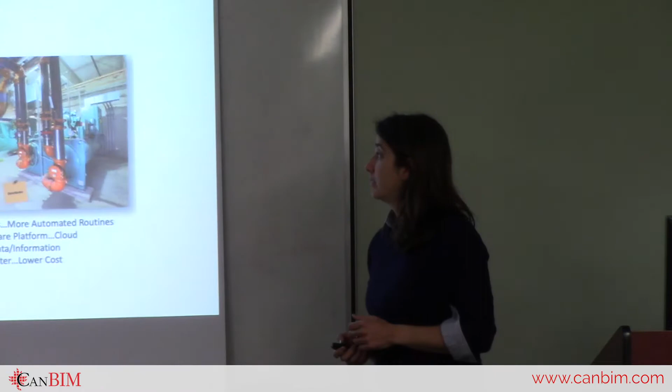So what did we used to do? I actually, for my 16th birthday, got an electric eraser. Some of you guys might not even know what erasers are anymore. That was cool when I was 16 because I would draft on the side for the family business. But what we did and what we still do is a highly manual paper-based process.

Just because you buy a computer does not mean you've replaced paper. You've made it digital. I take notes all the time on my tablet. It's still paper, it's just a digital piece of paper.

So highly manual, it's got errors. It's just by nature, you're going to deal with a lot of people, and people are good at nature but create errors. So you have a lot of redundancy in that, a lot of checking. When I came into my company, we had a 40-plus year veteran in our department that would check to make sure the computer takeoffs were correct.

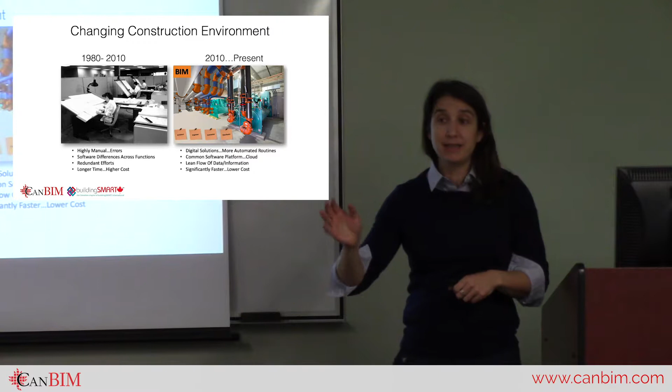I was blown away, top-notch talent. This guy had more talent in his left pinky than I've learned yet in my career. He would sit there and check the computer outputs. I'm going to talk about how I still see that today. I travel 90% of my time, and I see it in every purchasing department, every fab shop, every engineering office. There's somebody checking somebody else's work.

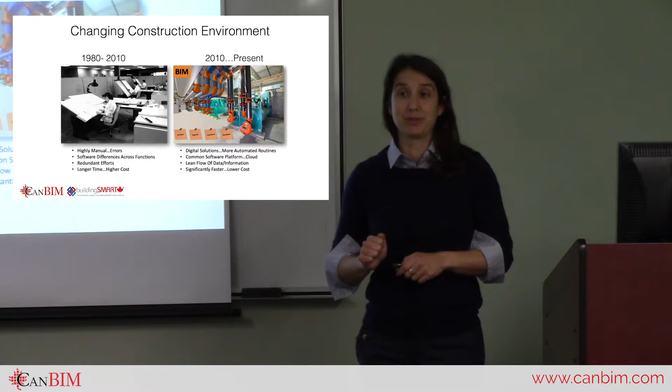So where can we go from a digital solution? How can we program, how can we allow the software and processes to avoid that manual check so we can use the talent where it's needed? And I always say about this: significantly faster at lower cost.

What's happening in our industry is it's faster, it's a higher level of quality, it's not always a lower cost. So when you hear that BIM, who thinks BIM costs more money than traditional coordination? Normally half of the room raises their hand, sometimes even more. They're like, oh my God, BIM's going to cost me a lot of money. Normally it's the younger guys in the room that say no, BIM's going to save you money.

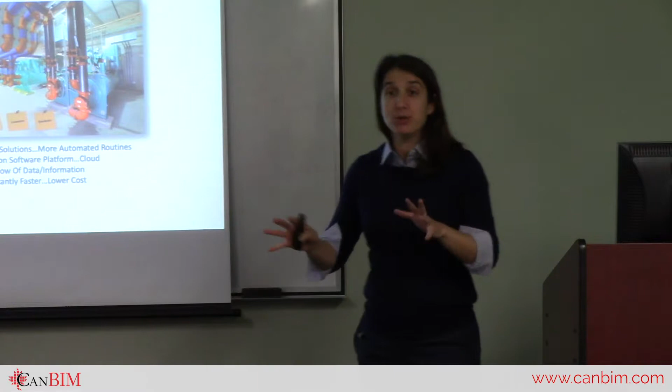I can tell you in my team, if I charge for traditional coordination, it costs more than BIM. I'm charging you more for you to send me a billion emails than I am to have me pay for the software, and you use it because of the errors we create, the lack of data analysis that we can't do in the paper-based process. We can do it, but we just don't have time to do it. So that's what we're going to talk about.

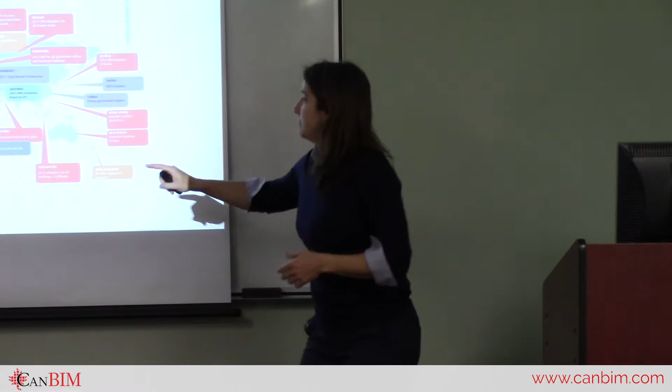We saw this earlier today in the first session. What I love about this slide is the colors mean whether they're adopted or not, but one of the most thought leaders in our industry in BIM, lean, and fabrication is Australia.

What would you think is interesting about Australia? It takes a long time to get a valve, a piece of structural steel. Anything you miss, it's a long time to get it on a slow boat from somewhere if they want it. What's interesting is it's a highly union, high cost environment, but they also share labor because there's not a lot of labor. It's pretty similar to Canada in the amount of major cities, and then a vast amount of territory in between with mining involvement.

So I always look at Australia. They're small and on the other side of the world, but they're leaning towards, they're not saying the government has to tell me to do this, but as a collective, the contractors, engineers, and architects have gotten together and said, we just want this, it's going to make our lives easier. So that's what's interesting about Australia.

If you look at Singapore, they're a very small country, population, a lot of buildings, amazing architecture going on, but they have a minister in charge of construction who can force it down. At the contractor level, they're no different than if you're in the middle of nowhere Ohio or in the middle of nowhere Saskatchewan. The contractors are still really strongly paper-based, and they're looking for people to help them learn what to do.

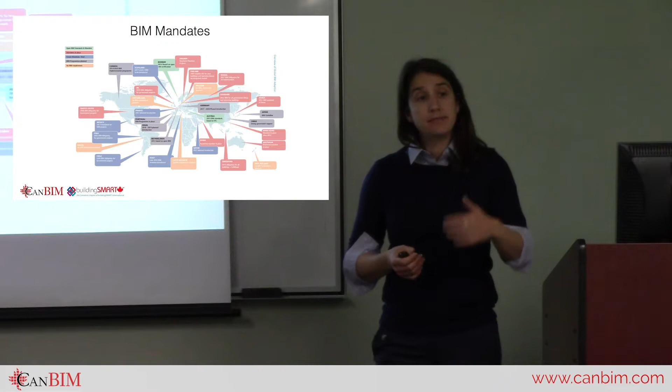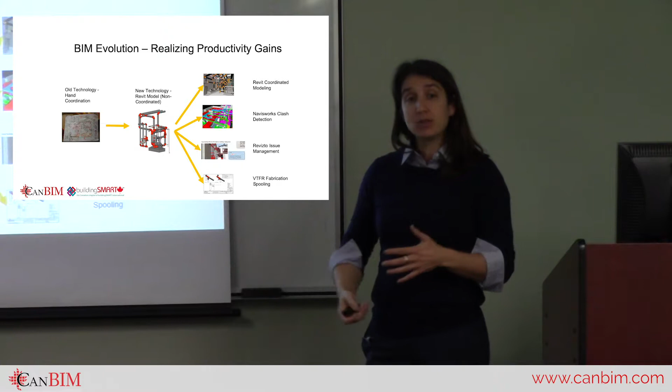It's because our industry is going to fabrication and modularization. A lot of these countries on these maps have leapfrogged other geographies because they've skipped the fab shop fab spools, where it's just a piece of pipe, a valve, and a coupling on it. They've gone to racks and skids and bathrooms and full floors. And that's where we're going. We're changing those practices and saying, how can we create a modular environment?

So I think Marriott did their first modular hotel in like 1975, 1980. It's not new. It's just not widely accepted. And why do you guys think that modularization didn't take off in the 80s? Most of the time, they said they looked like boxes. I didn't want a square box.

Modularization in the past made people think about what 70s architecture was. A lot of concrete, a lot of brick, a lot of squares, and I don't want that. So if you think, hey, modularization, it's a little modern, it's a little out there, I don't want that. It's not unique enough for me.

And now where we're going with advancements in software is architects can design almost anything. And we can decide from an MEP side, is it constructible? So the collaboration between the architect, the engineer, the owner, and the subs, we can go from concept to constructability.

One of the most unique projects I worked on was an arch, literally just over a highway in Qatar, and the building hung from the arch. So we had to get plumbing and fire protection and electrical to hang there. Ultimately, they scrapped the building because oil went down. But they dug foundations, and we had to find a way to get all of our services there.

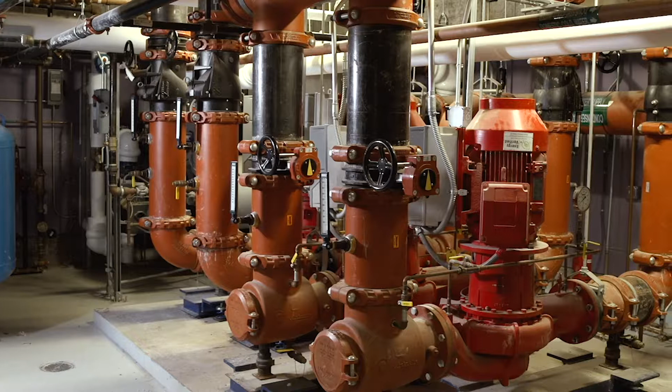So it was obvious upon initial review of the project that the mechanical room was going to be one of the areas that was very tightly constrained, just because of the size of it and the amount of systems that were going to be necessary to install.

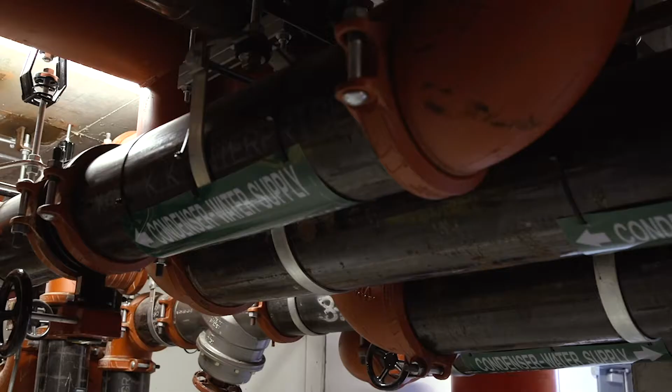So we went to Victaulic to find out what potential software opportunities were out there to help expedite the coordination effort. Victaulic brought their means and abilities to use Revit software to do a full-fledged coordination with the backgrounds we already had received from the architectural and structural engineering firms.

Victaulic and Poole & Kent had teamed up in the fabrication process. Autodesk Revit allows you to add add-ins. We had used VicTools for Revit - that fabrication add-in is what we use to produce all the Victaulic fab spools.

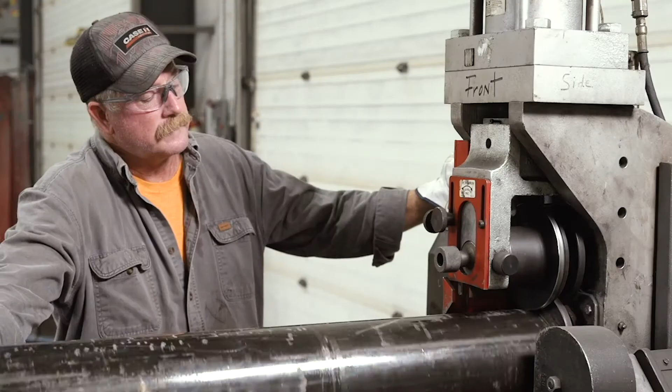Fab spools looked very well. I mean, they came in - we ended up getting the fabrication in and through the shop as fast as we could. Everything worked out nicely with the fabrication drawings.

It impacted our build schedule in a way that was beneficial to us, because we were able to get the material already pre-cut, pre-packaged, and labeled for the project.

It came down - we were able to build the room in 85 days, which was a 10-month turnaround on the entire job. The general contractor and the owner didn't believe it was going to be possible, but we were able to make it happen with the help of it.

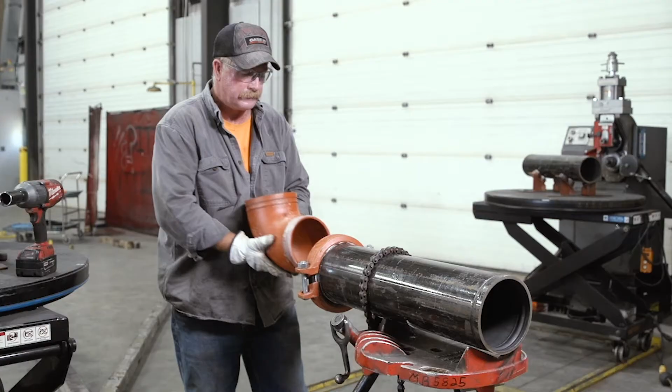Autodesk Revit was essential in Victaulic being able to complete our fabrication spools on time, allowing Poole and Kent to complete their project on time.

So what was really interesting about that project was you can watch it over and over again. What was interesting is that they were very late. A contractor has a world-class drawing team, a world-class fabrication team, and they needed - they didn't have Revit capabilities in-house.

So standard practice today in some of our industries is we'll model it in 3D CAD or fabrication, or whatever their modeling software is, and then we'll pay somebody to change it into Revit and make that the end deliverable. And they realized they couldn't work within their flow if they did that.

So by using and identifying a different software and identifying somebody that could partner with them, it was able to meet their goals. And I think that's what's big about our industry today, is there are so many people out there willing to share information.

There's online user groups, and there's Autodesk University. They have a conference in Las Vegas every year around U.S. Thanksgiving, so it's November, third week in November every year. But there's all these different groups like CanBIM that are here to help you learn the process. So that change management is an internal thing you have to do in your company, but to learn it, the technology is not that hard.

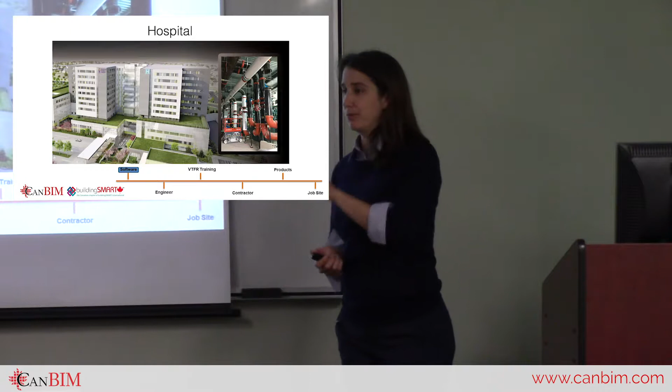So 414 Light Street, let's take that in. We don't have the rights to talk about the hospital, but it's a very large hospital in Canada somewhere that was just finished.

And the engineer on the project wanted to use, it was a Revit job. They didn't have all the expertise there. So they said, hey, I need somebody to help me be efficient using Revit. What my team did is we went in and trained them how to use Revit.

We then went in with the contractor and we said, well, we'll train you too, and let's get the engineer and the contractor together if possible. We couldn't always bring them in together physically, so virtually. Let's have the same training so no one can say I didn't know this or you didn't teach me this.

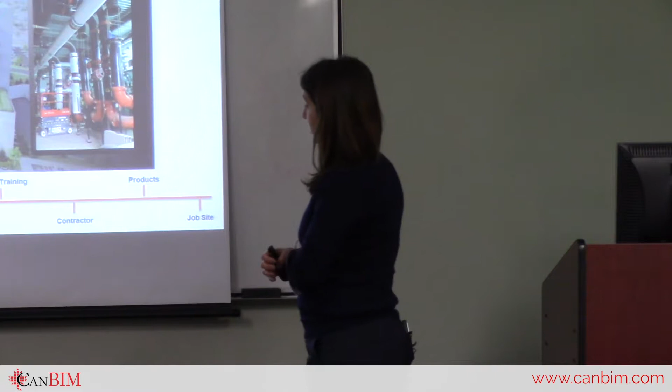And then actually for the contractor, we ended up doing some of the modeling because they had oversold some of their resources. But it really shows you how if you think up front, you can make it work. But 414 Light Street they were ready. The dirt was moved, the building was up, the owner was ready to move in. So you can have a really pre-planned environment, or you can have it where it's last minute.

It really can work both ways. It's different. Sometimes last minute is easier because you have less time to fight change.

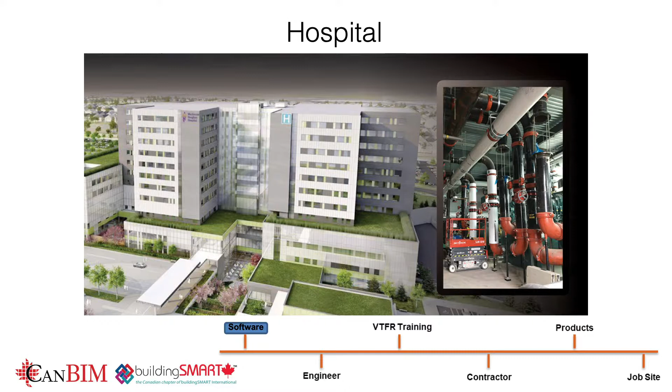And so on this hospital job, what it taught us is, we like to say we're one of the thought leaders in BIM and technology in the industry is, well, how can we use all of that data from the projects? Right now, we look at it by a project basis, or we used to. I'm going to talk a little bit about, coming up, about how we now try to aggregate all of our jobs together so that we know what we used, when we modeled it, how we modeled it, and how we can take those components and make them into more assemblies.

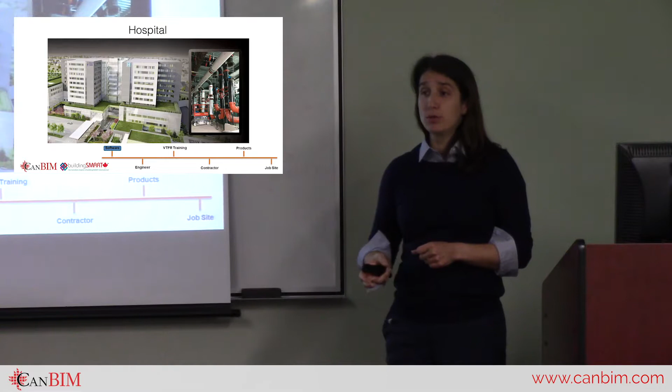So that's just a standard assembly. So we want to look at the data and break it down by building type, geography. Eventually, 3 years from now, we'll get into individual code for each municipality.

So what did we have to do in order to make these advancements? We had to create what our deliverables were. We had to have that common language so that everyone on the job, when we were saying something, there was a definition and a picture that went with it. I'll show some examples of those deliverables. If you don't show someone a picture, sometimes it's hard to understand what you're talking about.

What I loved about CanBIM, when they gave me the presentation, it said 9 places, and it said put a picture here, use the picture, don't use words. That's what we've tried to do a lot in our deliverables. Talk about methods of communication, keeping the scope.

Have you guys ever heard of nice guy syndrome? What I like to call nice guy syndrome is someone calls you up and you say sure. Somebody calls you up the next day and you say sure. All of a sudden you've said a lot of sures, and it's no longer your initial scope, but you're working around the clock because everyone's nice. I'm not saying don't be nice, but what we're trying to do with the software is know when we can, and sometimes just know, hey, it's not an option right now, or it is an option but you want to delay the time frame.

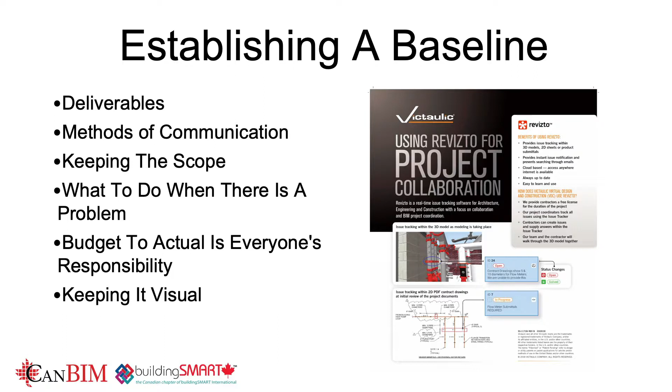And at the end, keep it visual. This is an example of one of the documents we created to share with our customers, to say this is how we will share issues with you. So every one of our projects goes out. In our kickoff meeting, we actually talk about, okay, here's our collaboration tool, here's a seat of that collaboration tool. We'll pay for it for you so you use it. We'll teach you on it. And here's why you'd want to use it.

Instead of this - in the old days, this was an Excel spreadsheet. So this is just our sample pack that goes out, because a lot of times when you're dealing with contractual methods, you just don't know what you're dealing with. So every job, we cloud over what we're doing. I love it when we talk about LOD 200, 300, 325, 327, 444 - people have made their own versions of LOD that go back to nothing.

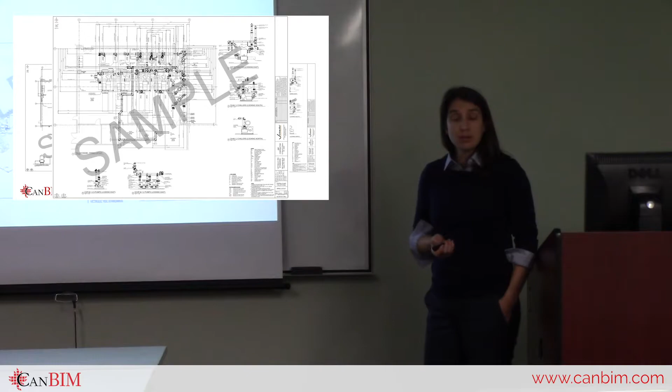So what does a picture do? A picture shows you what we're going to give you and how it's going to look, and it's going to be standard. One thing about our industry is this document can look a million different ways. What we've done is say, okay, you would not know if one of my team members in Richmond Hill or one of my team members in Easton, Pennsylvania did this document. It's just standard, and the computer spits it out.

And that's why we want to use talent where it's best served. Having someone spend all their time rotating and putting views on a sheet that someone may or may not use in a fabrication shop or on the job site - is there any value to it? I'll show later on where we're working with another software company where we're actually eliminating the paper, if you want to eliminate the paper.

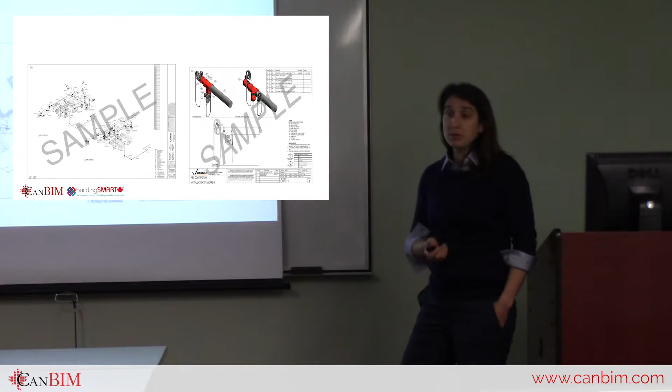The biggest change we made, which the data and good content allowed us to do, is we switched from manual takeoffs to model-based takeoffs.

Year to date, I've done 900 models for estimates. A manual takeoff, say just doing the mechanical spaces for a large hospital, would have taken about 30 to 40 hours, about a week's worth of work, by the time we did the takeoff and checked it. And you know how you check a manual takeoff on a job? You do another manual takeoff of the job. There's no way to really check it. People will spot check it with a guy and a pencil.

But we switched to model-based estimates, and that was a change. On average for a hospital, not talking distribution, depending on how large the job is, we don't always do the model for it, but we'll do a running meters worth of pipe and we've broken it down to a calculation. On average, for the whole hospital, all the mechanical spaces where you've got 80% of your money, it's 4 hours.

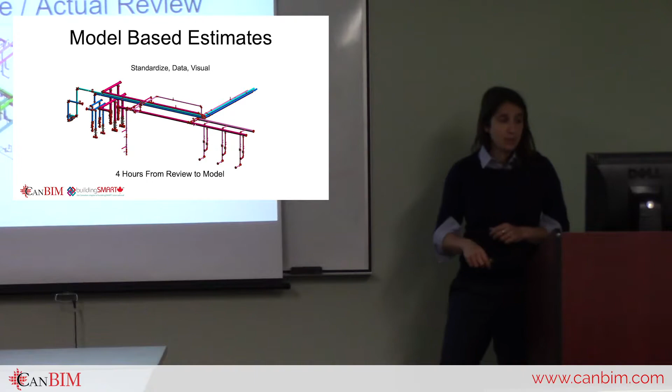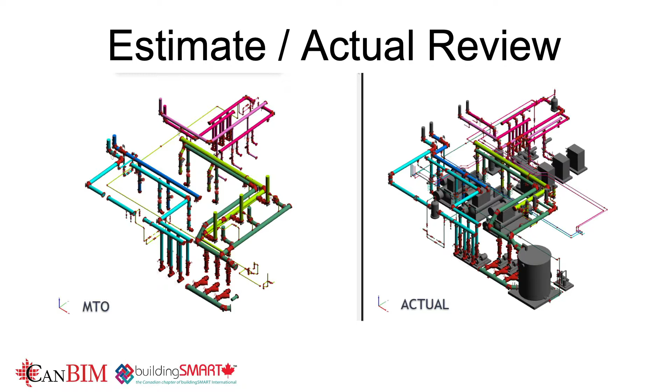So this is a live one. This is our estimate compared to our actual. And what the technology allows us to do, since we have a model-based estimate, is we can overlay them. If you don't do this today, or if you want to see design changes, you don't have to start at the estimate. You can start once you're through a couple phases of construction and overlay those. This could be duct, this could be structure, this can be anything, but you can see where those changes are.

So we do it from a visual perspective, and then we also have a spreadsheet that gives us diameter, inches, product, and those other key financial metrics that we look at.

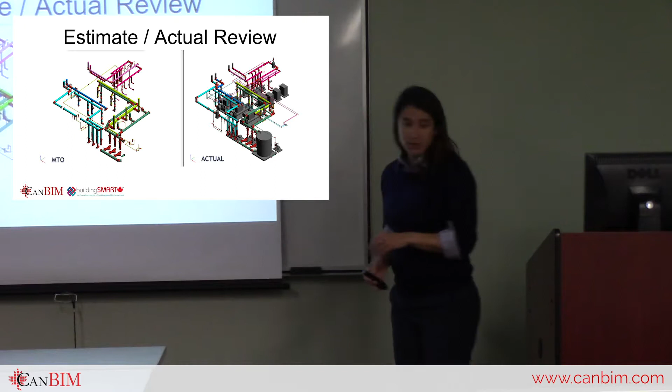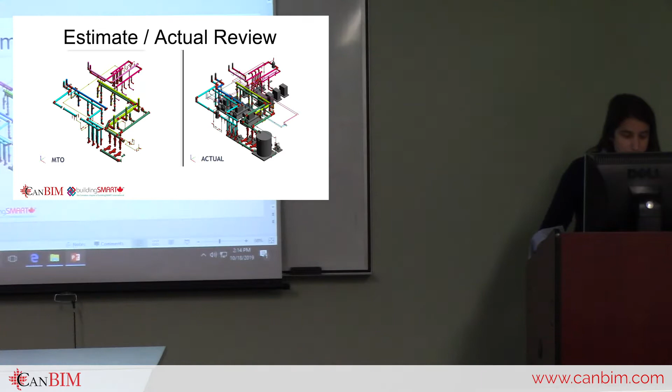But one of the best things that I think is... let's see. Oh, did it pop up? Sorry, this computer doesn't have 3D PDFs on it, maybe.

We also use 3D PDFs just to communicate information. We're talking about high tech and low tech, so just sharing this out on a 3D PDF where someone can walk around and see on the job site what they're supposed to see and what they're not supposed to see, using Acrobat Reader or Navis Viewer on your phone or tablet. We do that, and then we also use augmented reality where you can go in and it pops up in front of you.

But how do you go from this, which, who thinks that this is really quick and easy?

We should probably say it by age group. Most people would say, oh, this is so simple. I can get a piece of paper out, I've got a pen in my pocket, I can mark it up, take it back, take a picture of it, and they can work on it.

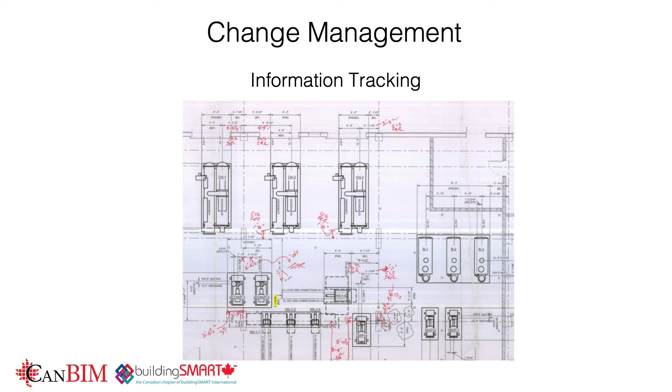This is my handwriting, and you can tell I failed handwriting class. So what happens? No one can ever read anybody's handwriting, and you've got to go back and interpret it. You've got to call that person up and ask what that dimension meant. I'm always fascinated that when you go to construction sites, there's more cardboard and pencils than anywhere else, and everything comes back with a Sharpie marker on cardboard.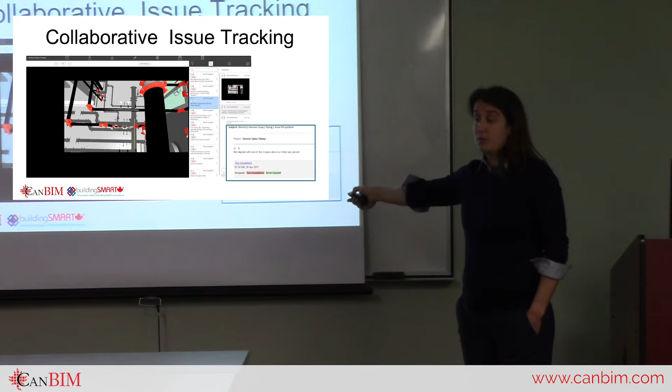Well, first what we did is we let the field do this, and then the person in the office had to go log everything. So it wasn't what the program was intended for, but it got us to where, besides me counting all those things I've got to fix, this now gives me a report of how many open items we have, how long they've been open, and who they're assigned to. So the change management is: path of least resistance - have somebody just data input it.

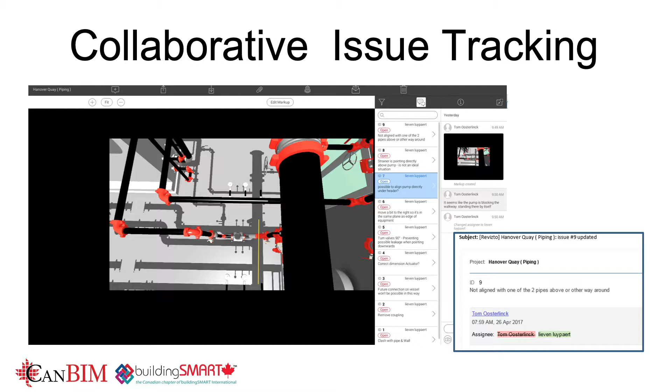Now, a couple years down our journey with repeat customers, everyone likes it because it's easy, it gives the picture. What's interesting - you can't see it on this one - but we put all of our 2D and 3D documents in it, so you have access to every document on that job if you want.

What we really try to do is not overload people with too much information, because of analysis paralysis - people will look at stuff until it's too long. But now we have this. We're actually working with the software company, saying this is great, but it's really on a project-by-project basis. You can see how many issues you've had, and it notifies the person if an issue's been out too long. But I've got 120 open projects.

At my level, I don't want to see every single issue - I just want to know if we're closing them in time. That's really where I see our industry going. Three years ago this wasn't a possibility, and I think at their user group in November they're going to announce it. So all we did was ask for a dashboard view.

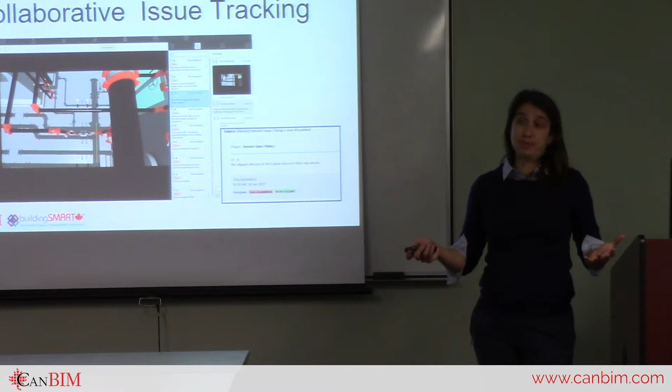So who's a gamer? You guys all play video games? Okay.

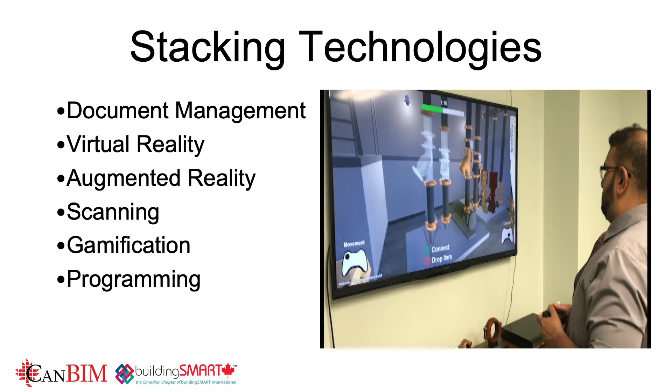Revit's cool if you've been in the industry and thought 2D was good - going to 3D, that's awesome. But if you want somebody to come into our industry for modeling - I mean, I don't personally enjoy it myself - what we're looking at is, from a training perspective, how do we use gamification to attract people into our industry and train them.

The fire local in Toronto just called us up and said, hey, I'd love to teach our guys virtually how to trim out valves before we go into the shop environment and actually trim out the valves.

So what we've been working on the last couple years is bringing in students like yourselves. What we do is have them put the pump build together in the office - they play the game, model it in Revit, and then they build it. That brings a level of safety into it, so we're not putting you with tools before you're ready for them, but it also gives you the ability - if you could virtually put it together and build that virtual plan before you actually went out to the job site - you're that much more prepared.

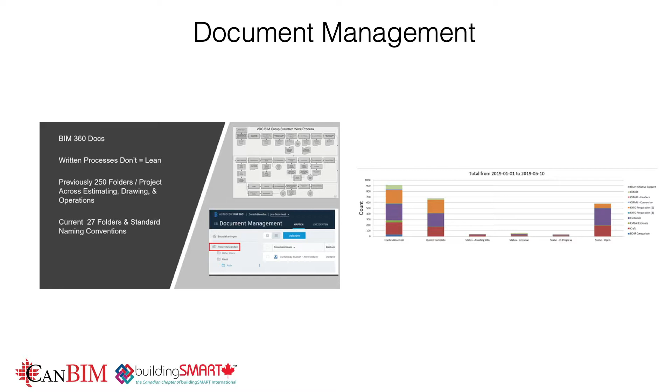This is where I was talking about from a document management perspective. Long before I came to Victaulic, we had flow charts and process maps. We were so ineffective. We literally had 250 folders, and we went to 27. We're no different than any other architect, engineer, contractor out there. I bet if you counted how many folders you had and how many times people were saving the same document, you'd get to a similar number. Our estimating team had their own sheets and never shared them once they were sold. It was like, this is my information, you can't have it, you've got to call me, you got to give me a bottle of bourbon or your firstborn child, and it still wouldn't give you the info. So there was some change management that went through, and we had to say, okay, everyone's on the same platform.

One thing that is big with change management is you're going to show your issues. Showing an error or a mistake is much better than covering it up, in my perspective. It's not about saying this person did something wrong, it's about fixing it. We all make mistakes. If somebody says they don't, they're wrong.

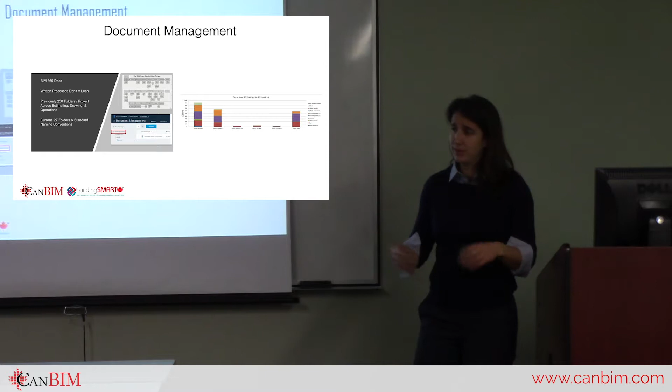So here's what we did. We changed over to using the BIM 360 platform. You could see where here we had our paper-based process. We looked out on the market and saw what was available, what cost point could we afford for the team, and did that analysis. We then said, okay, how will our internal tools work with it? Is there any need for programming? Is there any need for duplicate data entry? And now where we are today is one source of the truth.

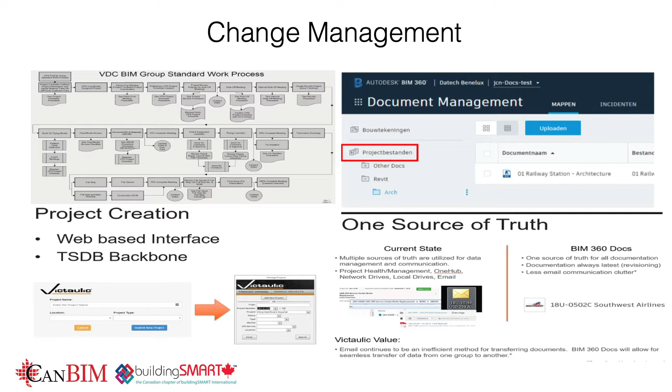So I talked about having that exploratory discovery phase, that implementation phase, that maintenance and building upon that technology. We signed a 3-year contract. So year 2 next year, I have to decide if it's a go or no go to kill the software, because it takes time. So what we do, it pops up on our Outlook calendar that says it's time to review if we are going to stay with it or not. Simple process - the day we sign a contract, we put a couple email alerts into our calendars and our master calendar, and it tells us hey, it's time, and we highlight months by those phases. It's so simple, easy, and visual, and we just know when you have a project, what are we going to use? Because next year there might be something better or something less expensive or something more widely used. So we want to have that understanding.

Who here's been on a scan or scanned a project before?

I would say most underutilized tech in our industry is scanning. The United Association of Pipe Fitters every year for Canada, the US, Scotland, Ireland and Australia comes to Michigan, and there's a couple thousand trainers, and every year there's like 7 people that sign up for the scanning class. Total station layout for hanger inserts - classes are full. Scanning classes, I cannot figure out why people don't sign up for this.

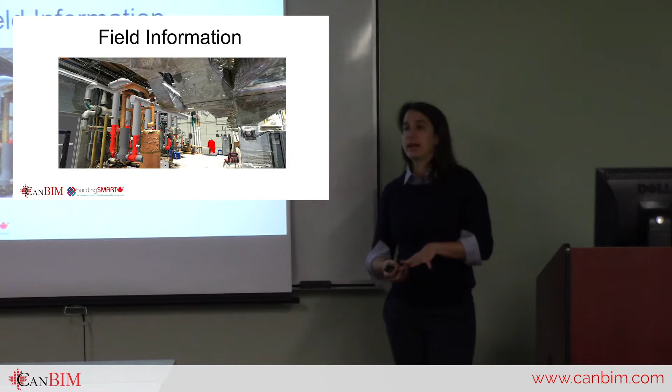So our process - this is a job we did. Black was reality. Red was where it was supposed to be.

So a lot of people think that when you cut on a job site, you're only cutting that one piece, and it doesn't affect everything else down the road. So what we did is we went out there, we scanned it, we pulled some quick dimensions, we pulled it into virtual reality, and we actually walked the owner through and showed him that the penetrations were not in the right spot.

Couldn't get him out to the job site, but we could get him to sit in his office. He was into tech, but if not, we could have just shown him on the screen. But he was able to walk and see that hole was in the wrong spot.

The same amount of time it took us to do the field measurements on this size of a job was the same amount of time. We didn't save time, but we had a repeatable image that we could go prove to management and field personnel what the issue was.

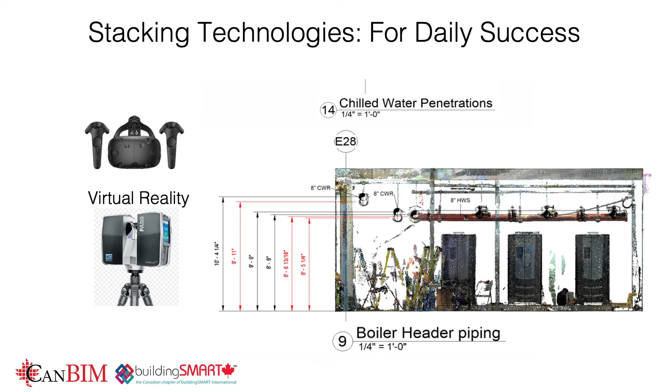So what I talk about, stacking technologies, is we then use this internally as a learning lesson, because you can't get to every job site. What do a lot of guys on the job site not like? A whole bunch of students walking around and getting in the way all the time. But also, I can walk through 200 projects now in the office, and I can have a better plan for when I'm out there learning on the job site.

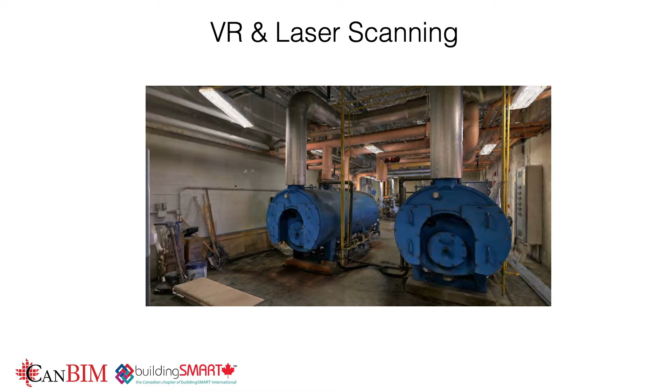So this is a scan of a little retrofit, and I picked this job because it's a small mechanical room, but it shows that you don't need large projects to make this tech valuable.

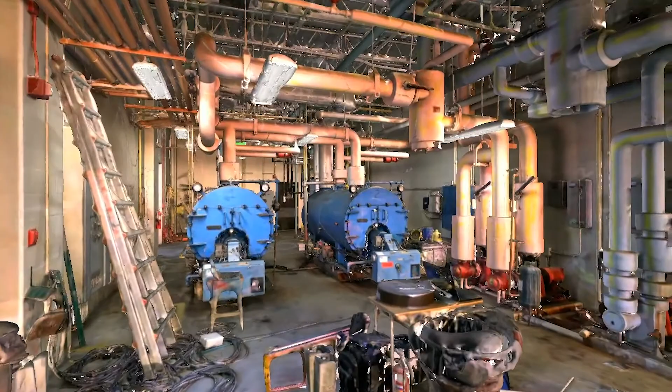This project was about an hour and a half away from our office. We drove there, set up the scanner 15 times, and came back. By the end of the second day, we were able to walk through the project, and we were able to work with our customer and the other trades to actually determine what was really coming out of that boiler room and what was staying in the room.

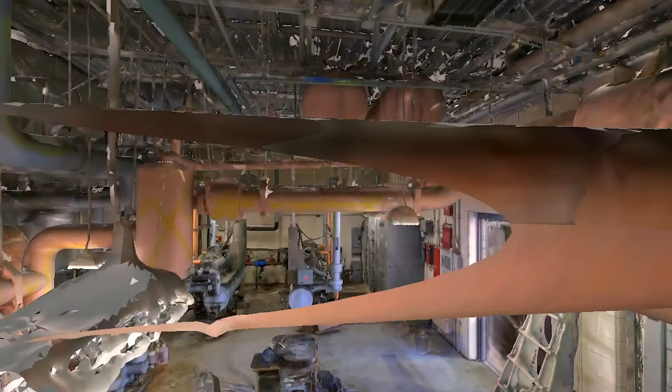A lot of times, on the phone, you're like, oh yeah, the gas line's coming out, it's moving. Well, which one? The one on the northeast corridor, close to the mop sink. Oh, okay, really? So this allows you to instantaneously cloud over it, mark it up, and say, hey, this is coming out. So this was the job scanned.

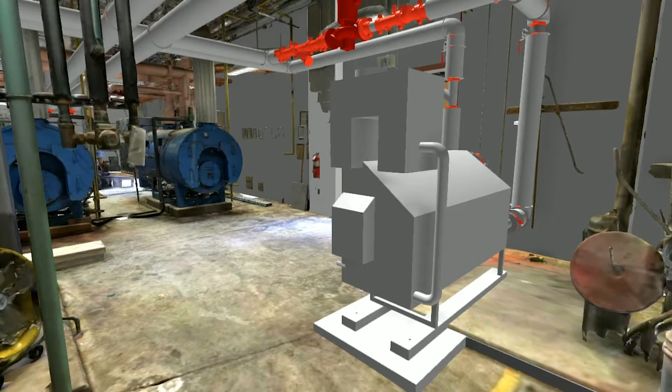This is like us going through the headset where we went in, and now you saw where the pipe was going, and the new equipment. So we were able to take dimensions of the doors to see if it fit in the room. We were able to see what we were going to hit.

Do you guys think a scan is 100% accurate? No, you're going to hit something. That's why you're fitters and skilled trades. So you're going to hit something, but we're going to identify where those hits might happen, and we're going to put breaks either in the system. So we're not going to make that into a modular unit, or we're just going to say, hey, you're going to have a problem here.

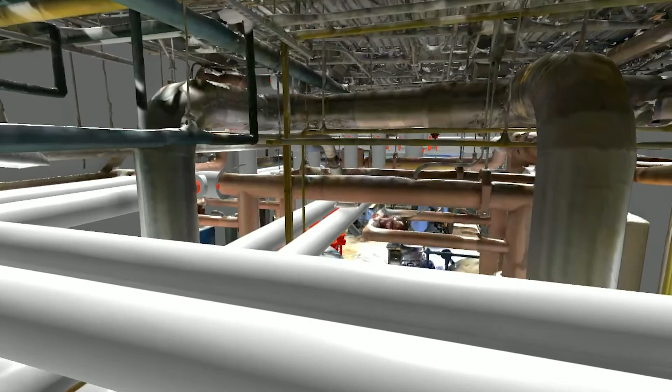You can see where you've tied into existing piping. You can run schedules on insulation that you need, all those things, because now it's in the model.

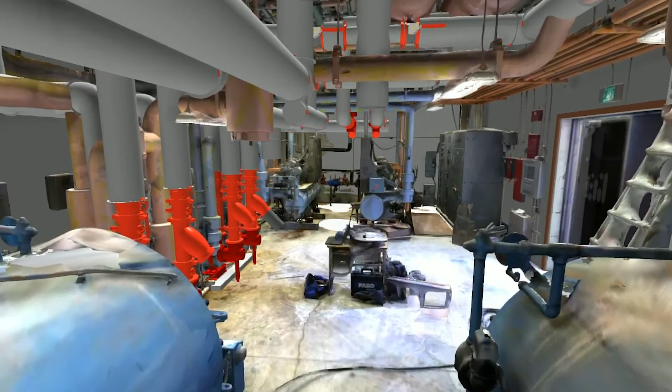In the past, we'd send two people out for a couple days. They'd take all the measurements. They'd get a call back from the guy in the field when the demolition was more along, or the project was further along with the install, and we'd see how does it fit, and we'd keep going back and forth with those manual entries.

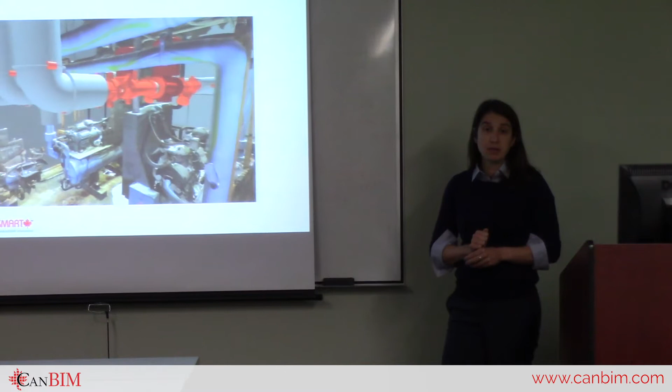So it doesn't have to be huge projects. From some cost perspectives, a typical scan with this, minus putting our pipe in but rendering and stitching everything together, was $3,000 back when the Canadian dollar was on par with the US dollar. So maybe like what, $4,000, say $5,000. You can have that. And sometimes bigger jobs are actually less expensive because you're already out there.

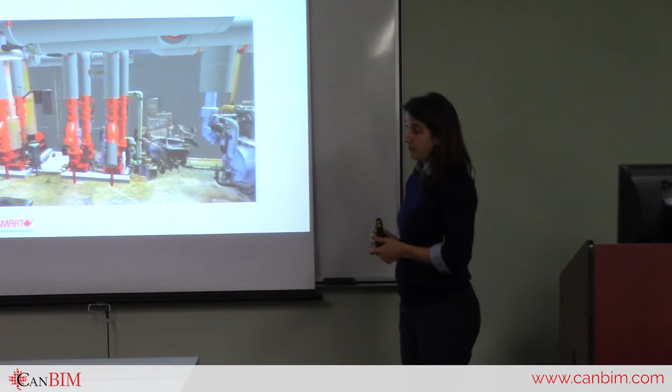So this is the scan with your model integrated together? Mm-hmm. So we took this—this is Revizto that we're walking around, and Revit that we modeled in, and we just overlaid it. There's an add-in in Revit that you hit export to Revizto, and it will generate this.

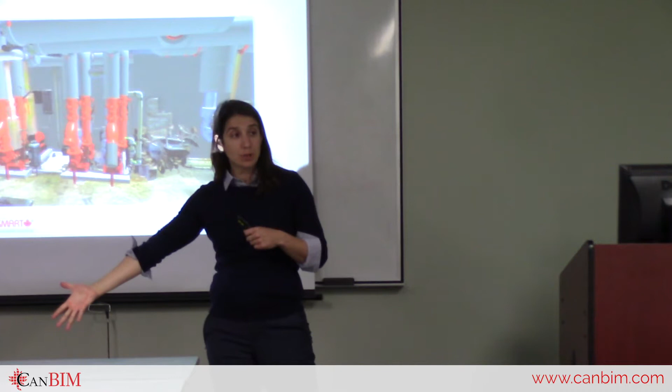And then we use Revizto also for either the Oculus or the Vive, the virtual reality. So virtual reality is when you're consumed by it, like you don't know where else you are, you actually feel like you're in the room. Augmented reality is if I had a pump or chiller or boiler here, I could then see that the pump would go here, but you still see your surrounding environment.

And then Victaulic, because we're a consumer of Autodesk and a producer of drawings, we said hey, there's a little bit of a lag in our industry with piping, duct, electrical, the MEP trades in Revit. It's great for the architect, it's great for the engineer, but it hasn't always been there for us.

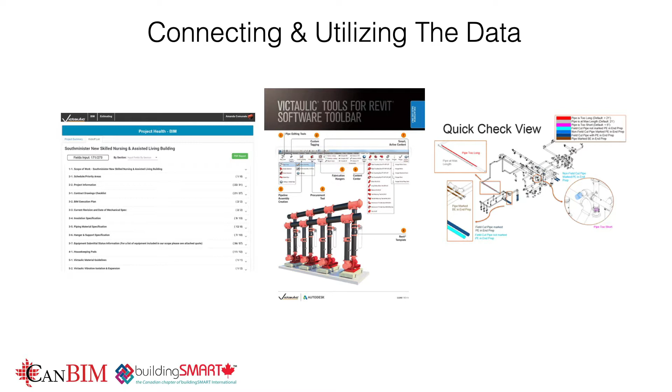And we switched to Revit 5 years ago. So what we've done is, this is our kickoff meeting. We have 272 questions we ask to start a job. What's your insulation, floor penetrations, pad heights, all the stuff you would do to do a job. We've said okay, here's the questions you have to start to do a job.

And now where we're at, we've already used schedules in Revit to say okay, if it's over a certain length, if a fab spool has a pup piece on it that's greater than 3 feet, it sends a flag. But now what we want to do is say okay, if the pad was supposed to be 8 inches, and in our kickoff meeting it says 8 inches, but in the model it's 10 inches, we're beta testing it right now in our own group, but it will say hey, there's an issue.

Right, so what we have today is we've got one monitor, and you're looking at your document. You got another monitor, and you have to remember to either check it, but the computer's not doing it for you right now. So what we said is, that's crazy. What does that do? That creates a lot of errors or possibilities for errors.

So we're working on saying okay, whatever is written over here will be validated over here, or if you change it in the model and you hit approve, you can change it over in what we call our Bible, which is our job book.

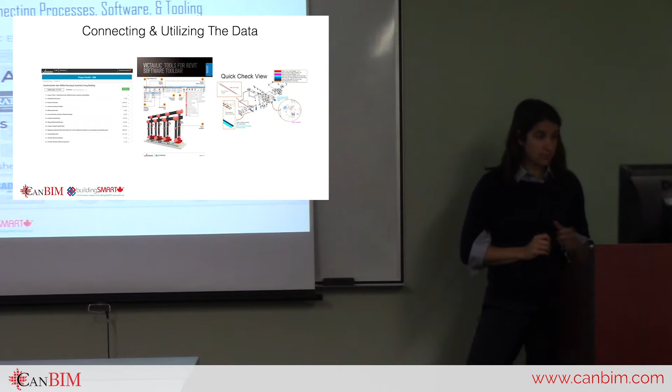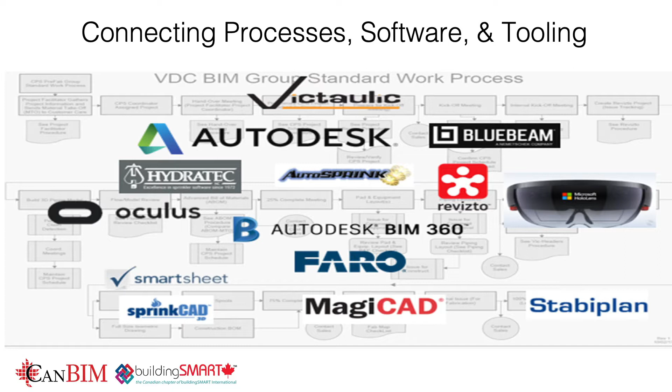And if you look at how you're connecting processes, software, and tooling, I would say there's a couple major players in the industry today doing this.

Okay, so the HoloLens, it was cool. No one uses it. We've got some that sit under desks if you want some. But no one uses it. We'd like to use it, but it was a little too hard to use, especially on the job site, because we've got to wear a hard hat. And I'm not going to pay $3,000 for a hard hat that allows me to wear this.

But what we're saying is there's a lot of software and tools out there, and how do you know what to buy? How do you know what to use? And that's where things like CanBIM and Autodesk University and Trimble's user group and Building Smart and all these different associations will teach you about them. But how do you create a peer group to help you better understand what you can implement?

And that's what we do at Victaulic. So where is the industry now?

Fabrication is one of the main reasons why people want it. Well, owners like BIM. Why? Because facilities management. I have yet to be on a BIM project where the owner is actually upfront telling us what FM program they're going to use and what they actually want out of it from an MEP side of it. So we hear a lot about it. I'm always looking for that unicorn project that it's existing on.

So this is just showing that they invited you, you got invited to it.

Oh, so you don't have to hit publish anymore. It automatically, yeah, before you had to hit publish, but now it doesn't.

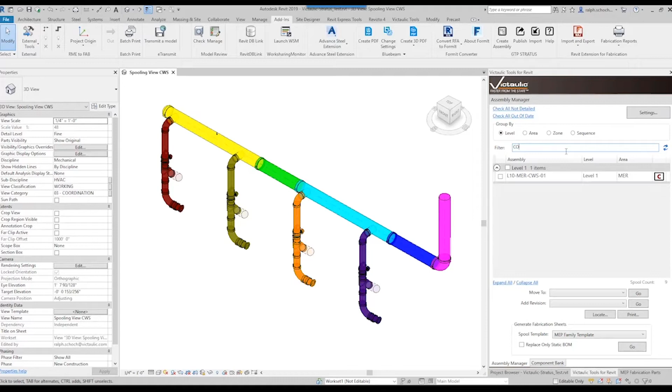That's really odd. So what's showing you here is that you can actually search and see what was cut, or you can search and see what was assembled, or search and see what was welded. Whatever those processes are out in the shop, you can see what's going on, so you know if you can make a change, and if that change affects you financially or just adds more manpower into the shop.

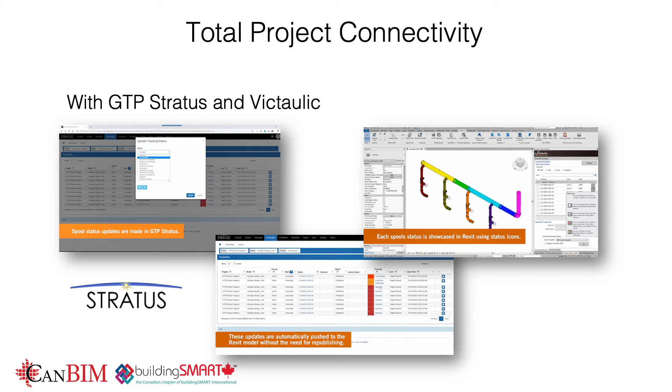What's interesting about this is 3 years ago this didn't exist, and now this software and other softwares are out there in the industry at an affordable price point to use in your shop. And what's allowing this too is it's allowing some mechanical contractors and standalone fabricators, standalone fabricators sell their fab anyways, but some mechanical contractors to understand what their capacity is and to sell that capacity within the market.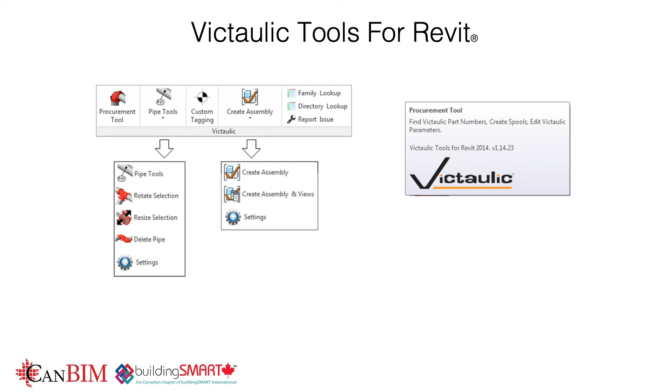They rotate pipe, they resize pipe, they delete pipe, it's all of those different functionalities. And what my team does and what we've built is we've built different programs to go mine the project to see what's connected to what. And then we're seeing how often we do those clicks.

And then it allows you to go to your estimating team and your field team and say, okay, would this be a standard assembly? It's already standard because you're already using it a lot. But do you agree to make this a standard product? So either your shop can make them ahead, or someone like a Victaulic can make it into a product.

What's at the base of BIM, what's at the base of a good process, it's that data, it's that content. So really what we've done is we've always been the gold standard for content, but instead of passive, where team members have to go to a website or go to an external content host site, what we've done is said, okay, we'll push it to you.

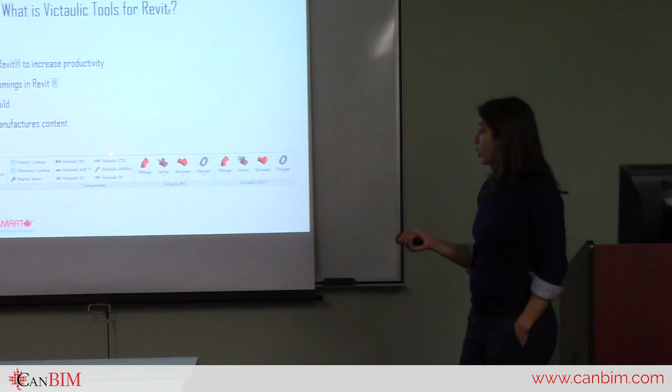Based on the type of system you're doing, if you're doing a muni project, a fire protection project, or AGS, our large diameter product, we will make sure that this content links. Because what do we all have too much of? Information. There's way too much information out there, and to consume it in a timely manner is getting harder and harder. So we said, okay, you tell us what system you're going to work on, and we'll make sure the content for that system pops up. You're not going to have fire protection content on an HVAC system.

In the past, and even today, anything will connect. So we want to make smart product choices based on best piping practices and based on that basis of estimate that we have. So to help out, we put templates out there. We give our Revit template away for free, and it has all of our pipe types in it, and then the content comes with our toolbar, which helps you get to that Revit journey much faster.

You should be able to bring on someone from a uni with a one-year technical degree or maybe a couple Revit classes, and team them up with someone. They'll know how to model in 2 to 3 weeks. They might not understand the piping side of it, but that's why we've made it easier by specifying what type of pipe types and products to go with it.

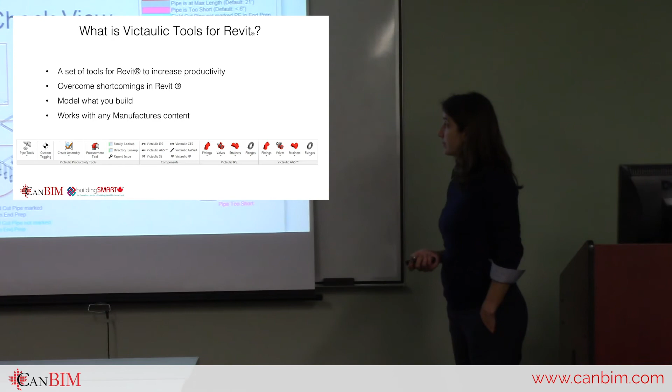Back to some of the checks that we have, which pop up on our team screens: pipes too short. Based on our installation instructions and our tooling, that piece of pipe is too short from a safety perspective - you want to keep your fingers. The pipe's too long - maybe you're going up a buck hoist or some type of lift, and you can't have the pipe that long.

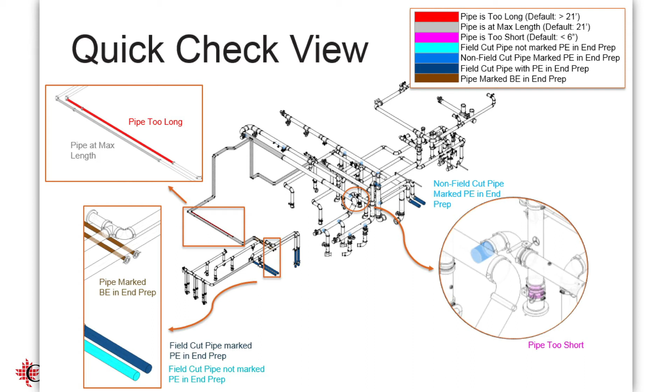Field cut, plain end, different pipe end preps, and knowing what product should go to the field versus the shop, and putting standard colors into the system. Depending on where you are and what type of pipe - if it's seamless, we typically put that at 21 feet because the mills give you a little bit of everything. So we've come up with those standard default methodologies. This is all stuff that Revit allows you to do, and then we have different views and filters so that it pops over.

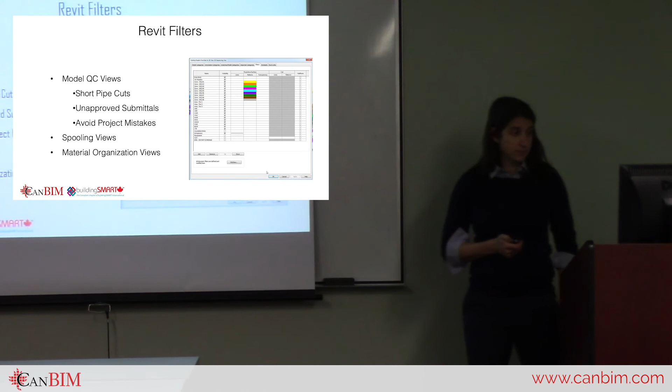So where are we going next? We just launched QR codes on our fab spools, so if you're out on the job site with, I think, an iPhone 8 or newer, you just use the camera to take a picture of the QR code, and the submittal and the installation instructions will pop up.

Eventually we should have enough videos that a 30-second video of how to trim out the valve or the working pressures of the product will show up too. But it's all about using high tech and low tech together - giving someone access to that information really fast and quick so they can troubleshoot on their own. The goal of technology is not to make them have to call somebody in the office, but to give information that's right at the point of their hands.

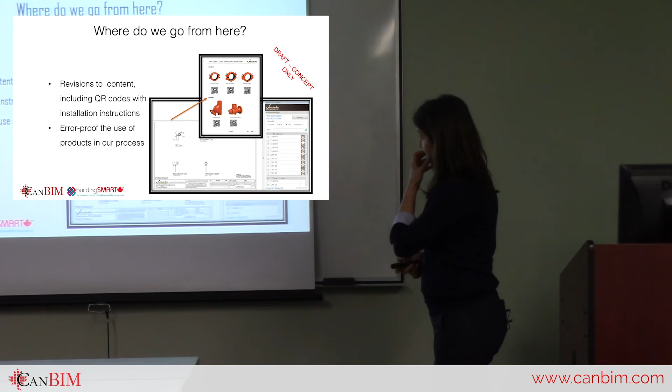We're working on the videos, and right now too, if you have a shop with a QR code, we work with each customer to understand what machine and tooling they have in their shop, and if you have a Lincoln Vernon tool or a Watts plasma cutter, the QR code will tell the machine what to do, or you can upload the whole file.

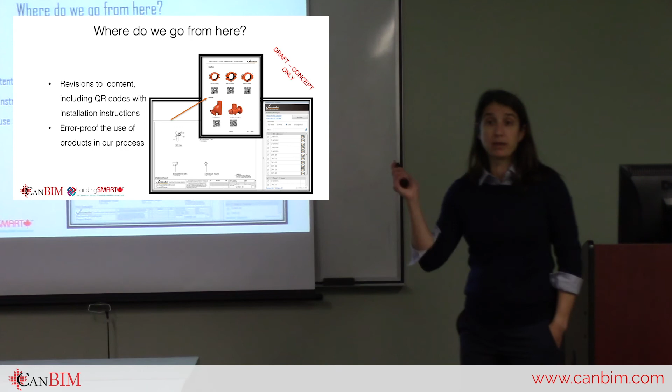Just real quick - it used to take us 6 hours, and this is really where we talk about that change. So it's change management. I've talked about how the estimator and the drafts person are closer than ever before, and how new generations don't want to come into the same workflow that was around forever.

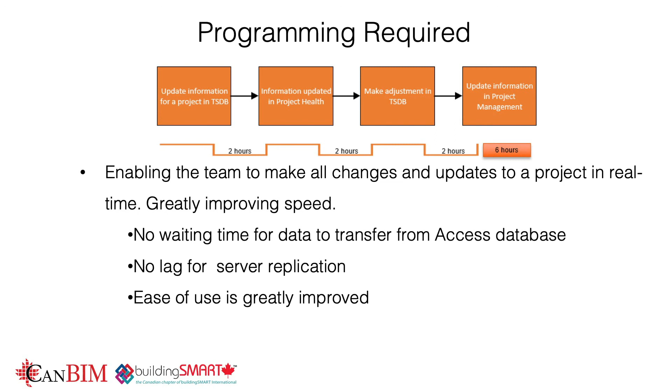It used to take us 6 hours to get data from one system to another because it wasn't automatic. And we never knew it took 6 hours—we just assumed. But when we actually followed the process through, on average it took 6 hours.

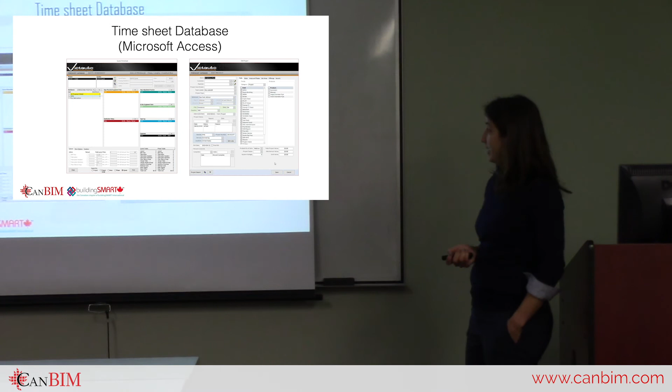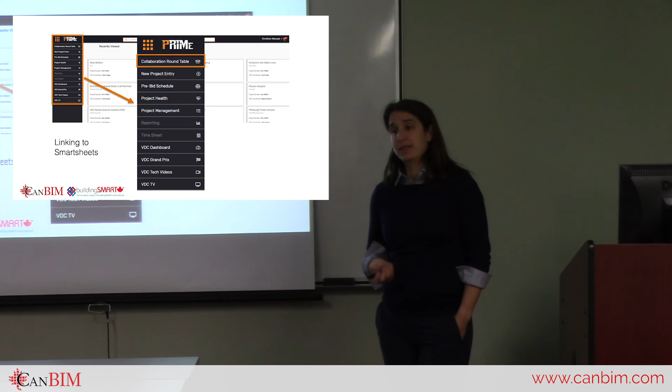Before somebody could actually use it in its full state, we had a crazy Access database that was awesome with data, but it took you 6 hours. So we rewrote the program. That's really the beginning: implementation, maintenance, and that kill phase. We had to kill the baby.

Sorry, I just want to go back to the QR code. So when you scan your QR code and you have access to your shop drawings and videos, where do you store the video? Where do you put them—is it on your website? Yeah, we're basically taking you to a link on our website. Oh okay, so you can basically go anywhere. It's just a link out. Yeah.

Okay, so we had to go to our team member who built this for us and say that we appreciated it, we liked it, it was good, it was great, and now it's not so good. Had some change management and had to decide what new language we wanted to write it in. We took it over from Access, and I can't remember the language they picked. But now it's end-to-end project lifecycle management in one system.

So we went from Excel-based to database to writing a quick program. Typically in the MEP space, for every 25 users there's some type of administrator. I said, I don't want one administrator for 25 people—can I have one administrator for 40 people? And can I make the administrator a programmer? So I used the same person, same head, but we trained them to become a programmer, and he loves it.

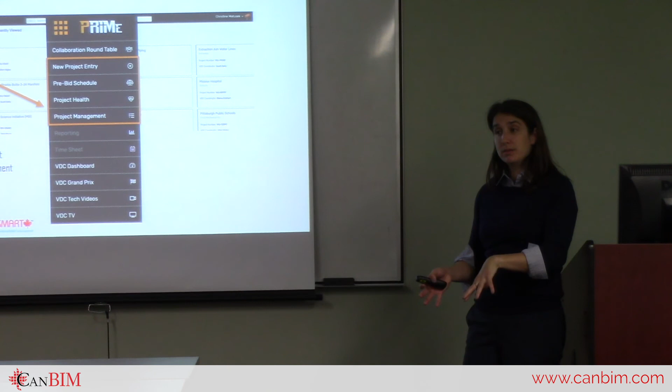So all your data is in one spot. I can now look up and see where my projects are, how they're going, and it's just the beginning—because every day somebody asks me a really cool question and I'm like, I don't have that, but we'll look to see if it's good, and we do it.

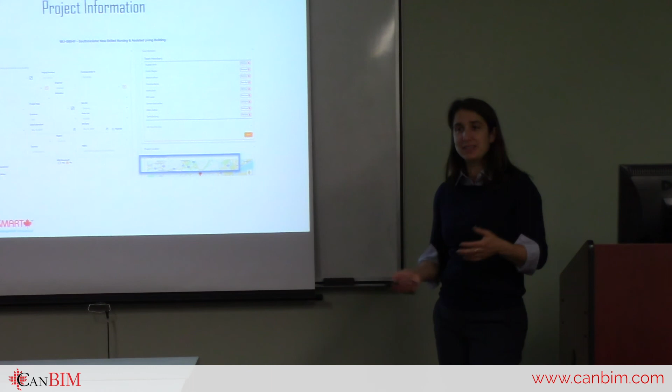So just wrapping up, I'm here to always answer any questions you have about different technologies. I'm not the techie person, but I can put you in touch with one of my team members if you really want to know how we've changed our computers and stuff like that.

From a business perspective, I encourage all of you joining our industry to stay at it—it's a great industry to be in. I love it, and it's always amazing to see something built, or to see something saved that was built 100 years ago. We don't just do the same thing. It's a very challenging environment.

To people in the industry, don't be too worried about the cost of technology or the change, because we're not taking jobs away. We're only allowing us to do the work we already have, but there is some reskilling that comes in, and there's definitely some sharing of information that our industry doesn't always like to do. I talk a lot about that mainly internally within individual entities—it's not about sharing information externally.

When I started 5 years ago, I said, why don't we just ask the engineer for the Revit model? My manager said, they'll never give it to us. I said, well, never is a strong word—my mom said never use never. And today, if it's a Revit job, we get the Revit model about 80% of the time.